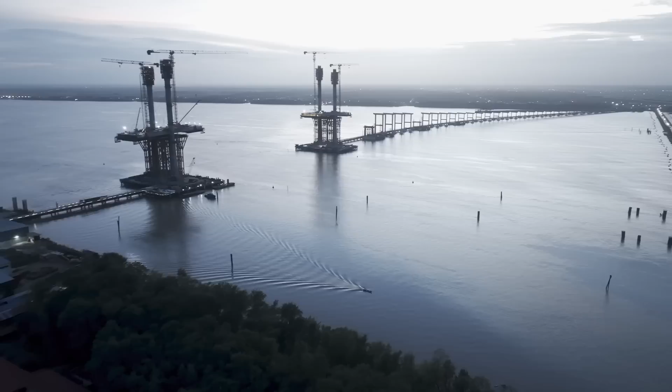One of Guyana's most impressive engineering wonders stretches approximately 1.85 kilometers and connects the country's east and west banks. It features a high-leveled fixed span that provides a horizontal clearance of about 32 meters and a vertical clearance of 7.9 meters for small craft.

Additionally, its ingenious retractable span provides clearance of 77.4 meters, allowing large vessels to pass through, a crucial feature for maintaining the flow of maritime traffic.

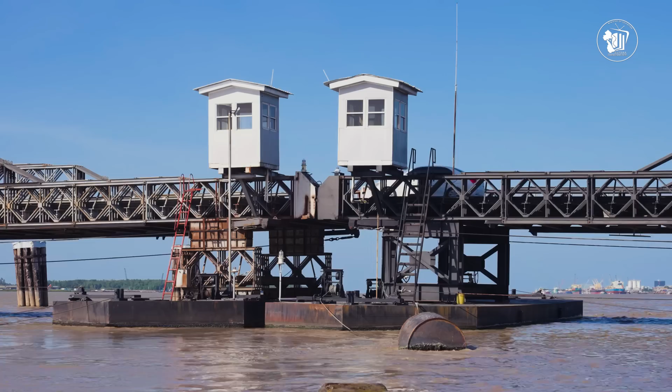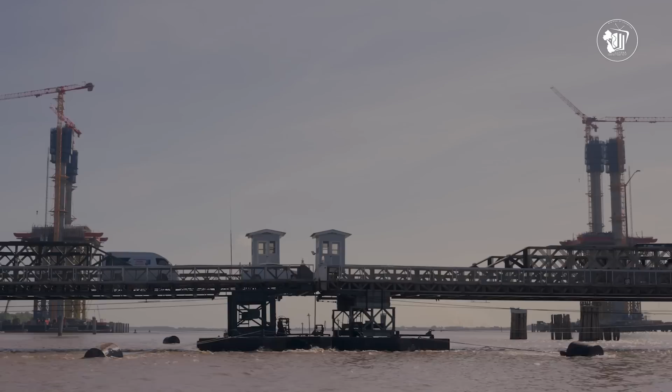Although originally built to last only 10 years, this wondrous floating structure has now stood the test of time for nearly 50 years. To this day, this structure remains the world's fourth longest floating bridge. This is the Demerara Harbour Bridge, old and new.

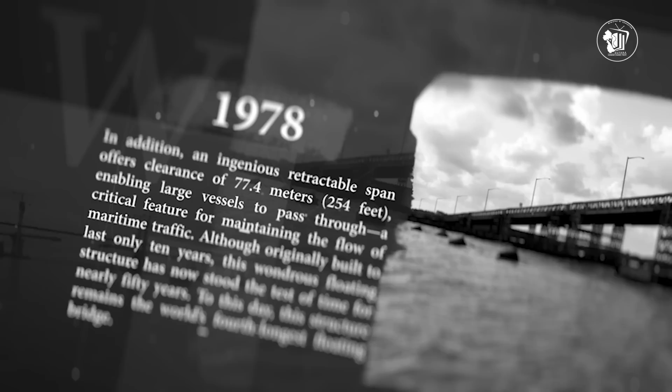Bridging the Demerara River is not a modern afterthought, but a vision that began to take shape several decades ago. Let's take it back to the early 1950s.

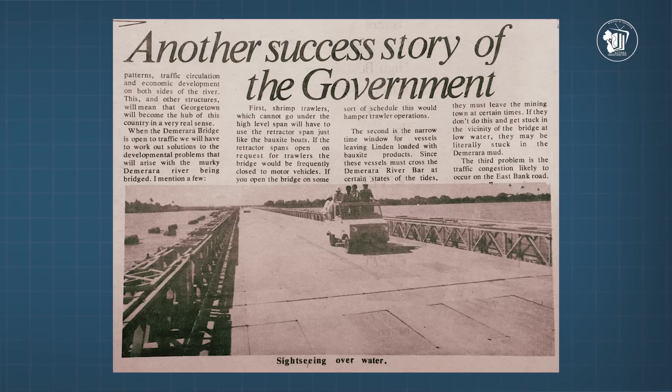In the early 1950s, as British Guiana was experiencing both demographic growth and increasing economic activity, a critical need emerged to improve connectivity between Georgetown and the vast expanses of West Demerara. Before the construction of a permanent structure, ferry services were the primary means of crossing the river, a system that was not only time-consuming, but also unreliable during inclement weather or peak travel periods.

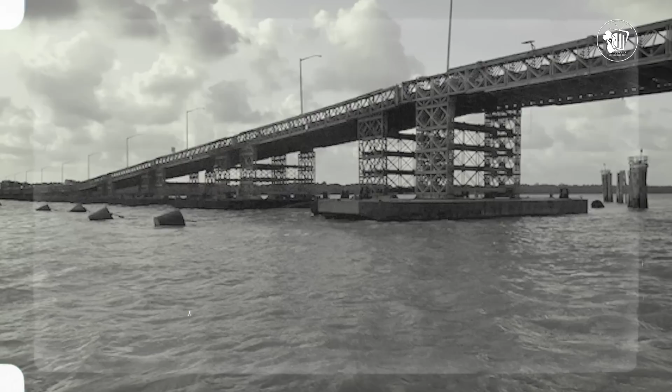A pivotal moment in the evolution of this vision occurred on May 23, 1952. On that day, the Legislative Council of British Guiana debated and subsequently approved the motion that is now recognized as the first substantial official step towards bridging the Demerara River. Introduced by the Honorable Captain J.P. Coghlan, the motion passed by a narrow margin of 12 votes to 9, highlighting that even then, the proposal was both ambitious and somewhat controversial.

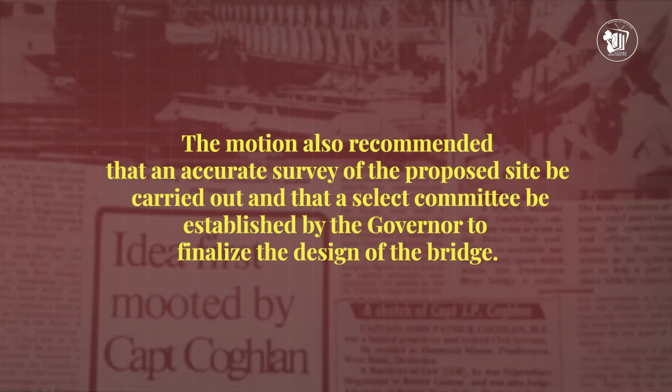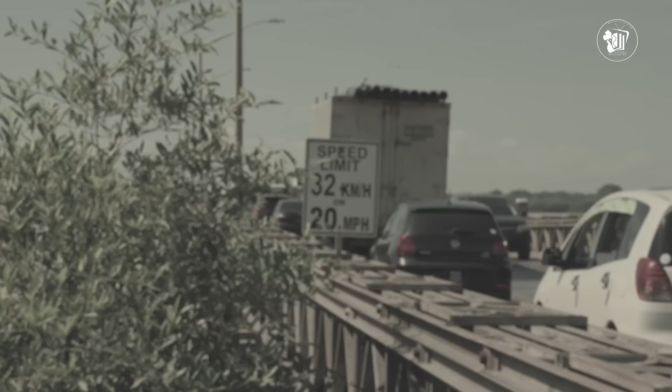This resolution called for immediate preliminary surveys to be conducted, including subsoil borings to determine the suitability of the riverbank strata for supporting bridge piers. The motion also recommended that an accurate survey of the proposed site be carried out and that a select committee be established by the governor to finalize the design of the bridge. In addition, there was a proposal to advertise for tenders and explore financing options, such as floating a loan, to secure the necessary funds for the project.

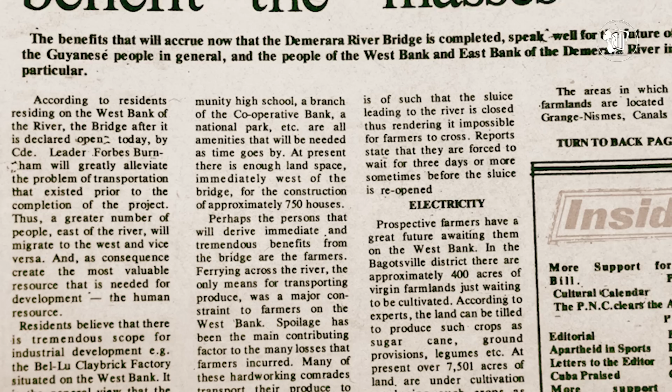Even though no immediate construction followed the 1952 resolution, the motion was far from futile. It established an official framework for conceptualizing such an ambitious project and laid the ideological and administrative foundation for what would eventually become the Demerara Harbour Bridge.

On May 29, 1976, the groundbreaking for the Demerara Harbour Bridge marked the commencement of an ambitious project that would ultimately redefine transport and commerce in Guyana. Central to the planning phase was the input of Captain John Patrick Coghlan, a respected engineer whose ideas significantly contributed to shaping the bridge's foundational design.

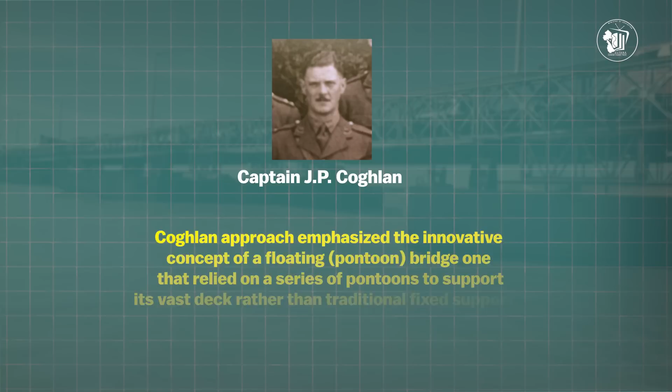Coghlan's approach emphasized the innovative concept of a floating pontoon bridge, one that relied on a series of pontoons to support its vast deck rather than traditional fixed supports. This design was particularly well suited to the dynamic and sometimes unpredictable conditions of the Demerara River, as it allowed the structure to adapt to changes in water levels and currents.

The unique engineering required innovative techniques in welding, soldering, and metal fabrication, pushing the limits of what was considered possible in the region. Constructing such a vast and adaptive structure required significant resources.

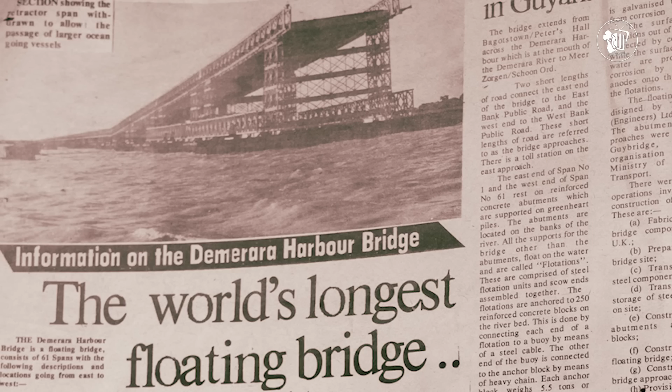Approximately 80,000 tons of steel were used, much of it soldered and molded on site using advanced metal fabrication techniques. Although early estimates placed the project cost between $4 and $10 million, the final expenditure reached roughly $40 million, reflecting both the complexity and the ambition of the undertaking.

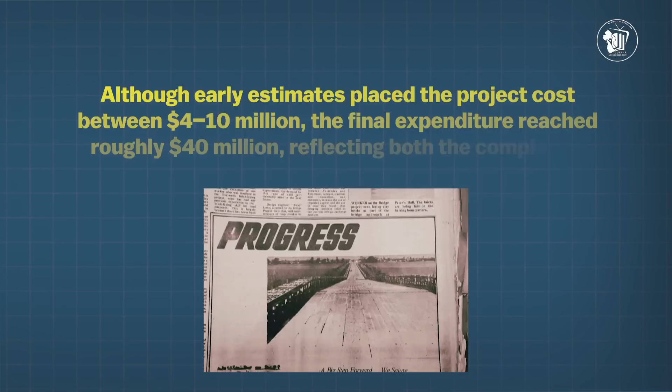After 2 years of hard work, the bridge was completed just in time for its ceremonial opening in early July 1978.

The inauguration was celebrated as a major milestone in Guyana's development, signaling a new era of connectivity and economic potential.

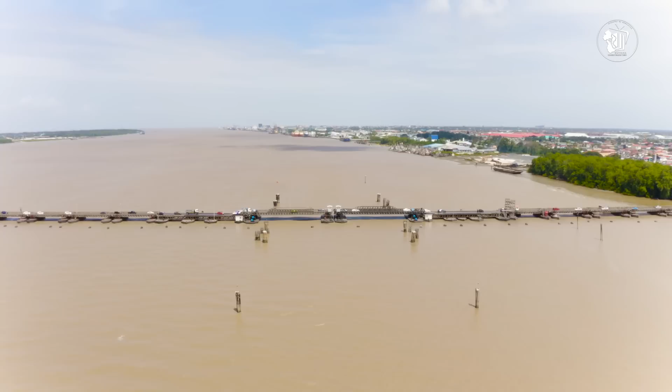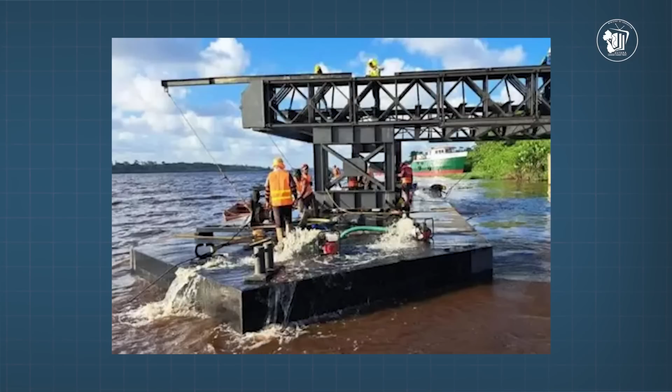Even though the Demerara Harbour Bridge was originally built with a design life of just 10 years, it has defied expectations. Now almost 50 years old, this floating structure continues to serve as a critical artery between Guyana's east and west banks, a testament to the visionary design and relentless maintenance efforts that have kept it operational long past its intended lifespan.

Its enduring strength lies in its innovative floating design. The system of 121 pontoons working in harmony to support 61 spans has allowed the bridge to adapt to the dynamic conditions of the Demerara River tides, currents, and seasonal fluctuations that would have posed significant challenges to a conventional bridge. The design entails 61 spans. During that time, it was predominantly what we call unifloats. Now we're using pontoons. The unifloats provide the same flotation as a pontoon.

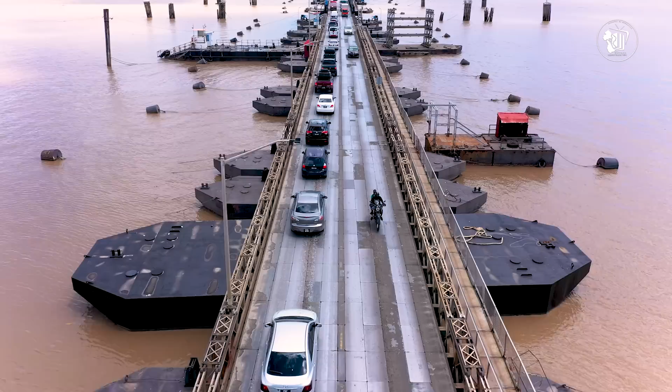Currently you have 121 pontoons that consist of the buoyancy of the bridge. You have 243 buoys. You have a total of approximately 35,000 feet of wire rope. You have a total of approximately 72,000 feet of chain. And you have a total of 726 5-ton anchor blocks. These blocks are in clusters of 3.

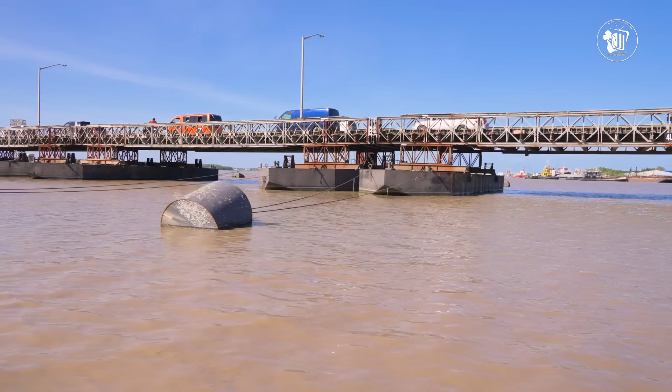So to every buoy that is in the water, you have an anchor chain linked to the buoy. The cluster pile is about 15 tons. Then the buoy is linked to the pontoon via sheaves, wire rope, and then you have winches that are used to adjust the buoyancy or the alignment of the bridge. So it's a combination of anchor blocks, chains, buoys, wire ropes, and the pontoons.

As I said, you have 726 anchor blocks lying on the riverbed. And these anchor blocks have what we call eyes, which is about a 1-inch thick metal cast in the block. And those blocks are linked via shackles. And then you have the chain connected to them. That chain goes to the surface of the water, connected to buoys.

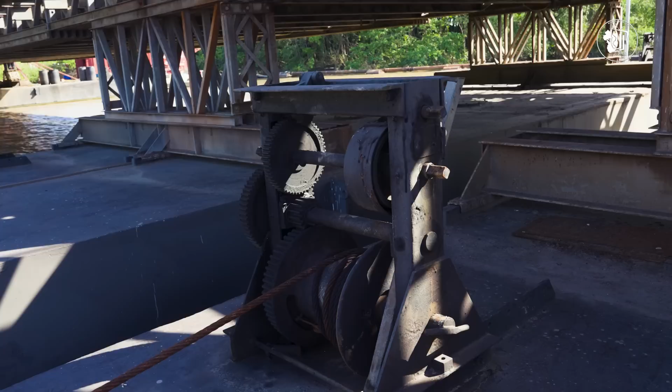These are some hollow metal components that are floating. They float. And then from the buoys, you have what we call sheaves. It's like a pulley, and the wire rope passes through the pulley. So as you have movement of the water, you have adjustment. And those wire ropes are then linked to the pontoon via the winches.

So based on the tide, you can do adjustments, right? You have logs where we've adjusted the tension of the wire rope, chain, buoy combination that provides that stability.

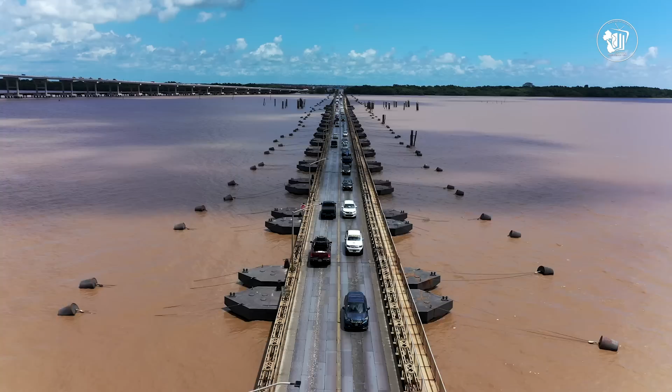So the main component that provides that buoyancy or the floating of the bridge are the pontoons. That is the 121 pontoons. You have two different sizes: what we call the extra large, and the small pontoons.

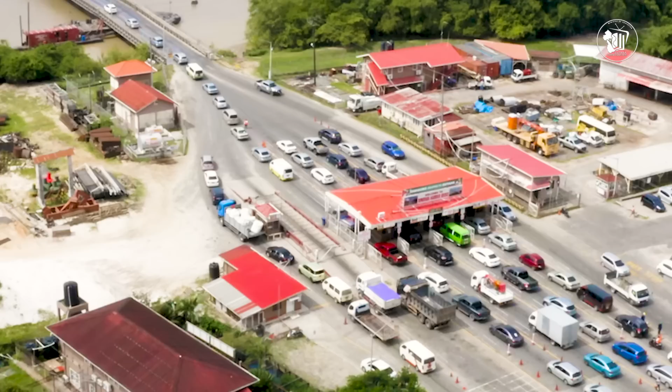Every day, the Demerara Harbour Bridge is a hive of activity. In its early years, around 9,000 vehicles crossed the bridge daily. Still, with the continuous growth of Georgetown and the surrounding regions, current estimates indicate that as many as 14,000 vehicles traverse this vital link each day. This impressive volume of traffic translates not only to thousands of commuters, but also to a significant movement of goods, connecting rural communities with urban markets and facilitating economic activity across regions.

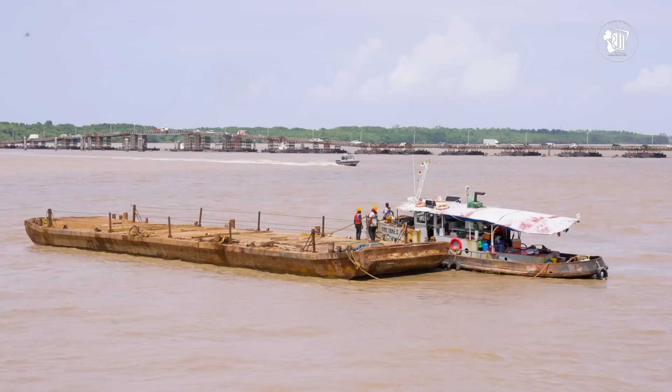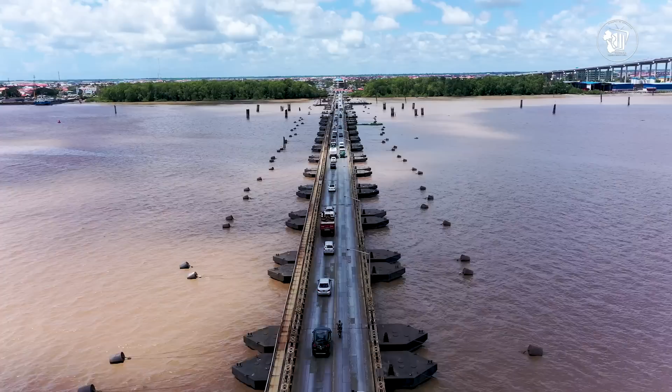Maintaining a structure of this magnitude and age is no small feat. One of the unique aspects of the bridge is that it's what we call a sectional bridge or panel bridge. So you have components that are connected one to the other, either by pins or bolts. That gives you the option of removing a component when it is bad or damaged and replacing it. For example, the sides of the bridge have panels, and all those panels are linked via bolts or pins. So if you're going to do a repair to a section, you remove the deck plates.

Back in those days, deck plates were not welded. They were secured by a different method than what we're using right now. So you had to unscrew those components, and you could retrieve the deck plates.

We have the end posts. Those are also pin located, secured by pins. You have the transom beam, you have rakers, you have other components. So the access to repair or replace is much more flexible than a fixed bridge.

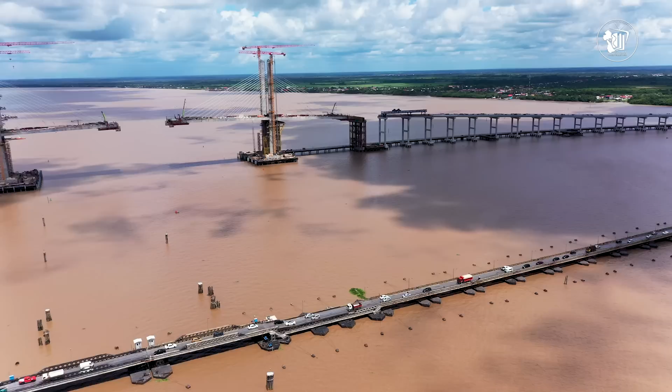Over time, the local knowledge would have increased and improved, and that is what caused the sustenance of the bridge. Not only Demerara Harbour Bridge Corporation employees, but other local companies are part of the maintenance regime. If you do the proration now, approximately 30,000 vehicles transit the bridge daily, east to west or west to east. The capacity of the vehicles transiting the bridge is much more in terms of weight.

So what we are doing right now, from when I took the reins as general manager, is what I will dub proactive work. We're doing day-to-day inspection, with teams going on the bridge daily to cover the carriage and undercarriage, and all the necessary key components.

You have zones we call braking and accelerating zones, where the vehicle accelerates or reduces speed. Key components such as the chains and wire ropes are checked. Also for the retractor span, you have rollers and other components that need to be inspected, apart from the deck plates on the bridge.

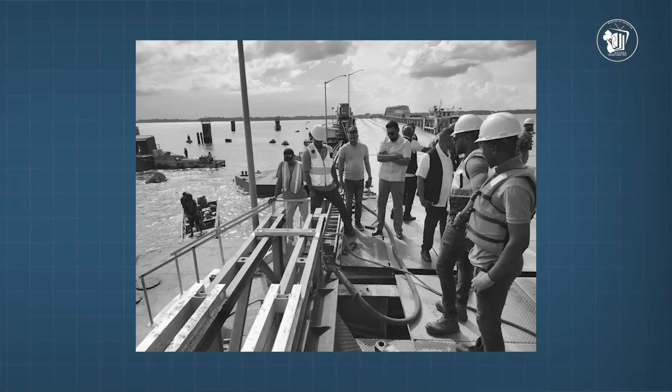So we do a daily routine, morning and afternoon. Out of those inspections, we prioritize the important work to be done in terms of maintenance or replacement. If the maintenance work is major, clearance will be sought via the minister, because the bridge will have to close for most of 4 hours. If the work is minor, we do it between 10 p.m. and 4 a.m.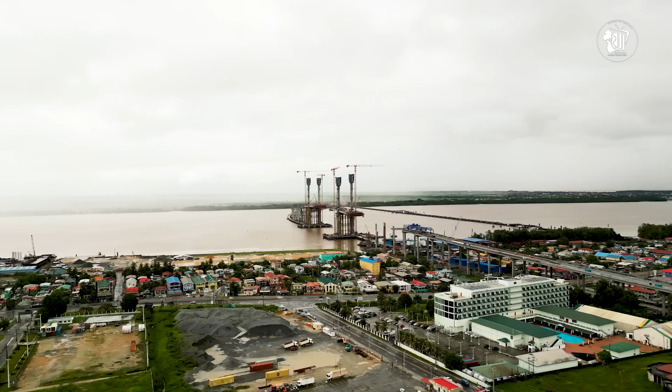As Guyana faces mounting challenges from an overburdened and aging Demerara Harbour Bridge, the need for a modern, resilient replacement has never been more urgent. Decades past its original intended lifespan and strained by ever-growing traffic, the old bridge has become both a bottleneck for commerce and a costly maintenance challenge. Its limitations not only disrupt daily commutes but also impede the efficient movement of goods, a critical factor in Guyana's economic growth.

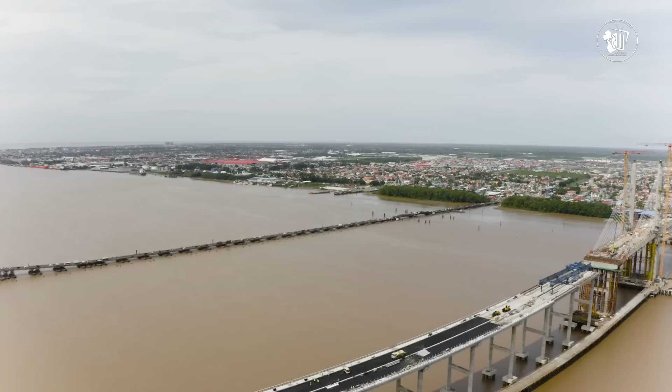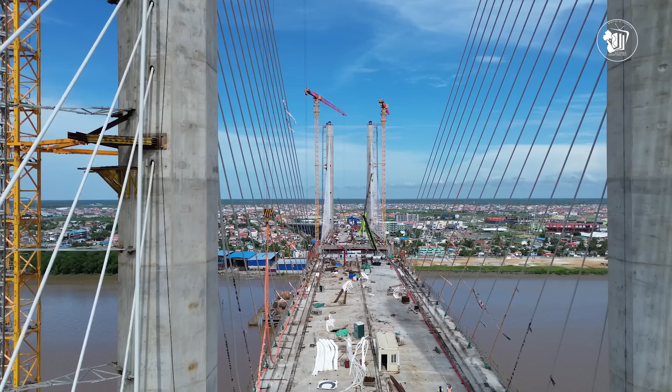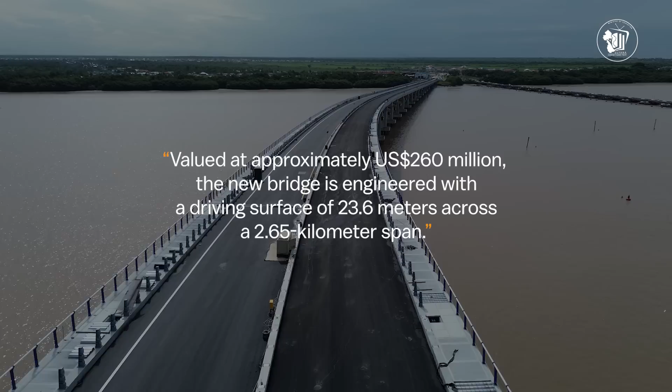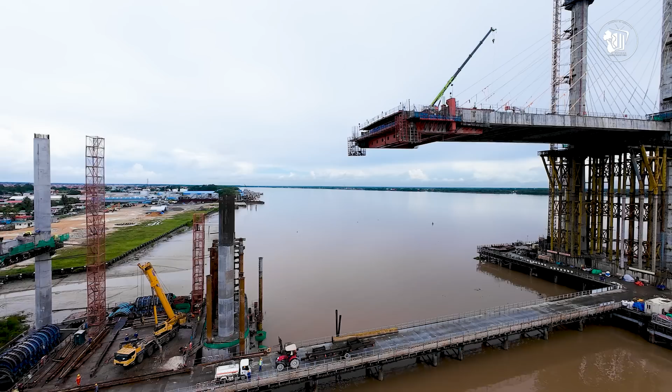In response, the government embarked on constructing a state-of-the-art Demerara River Bridge, a fixed 4-lane high-span cable-stayed structure designed to meet the demands of the 21st century. Valued at approximately US$260 million, the new bridge is engineered with a driving surface of 23.6 meters across a 2.65-kilometer span. Its modern design eliminates the need for retraction to allow maritime traffic, thanks to a generous 50-meter fixed high span and a clearance that permits large vessels to pass unhindered. This means that once completed, the bridge will dramatically reduce travel delays and congestion, enhancing both road and maritime connectivity.

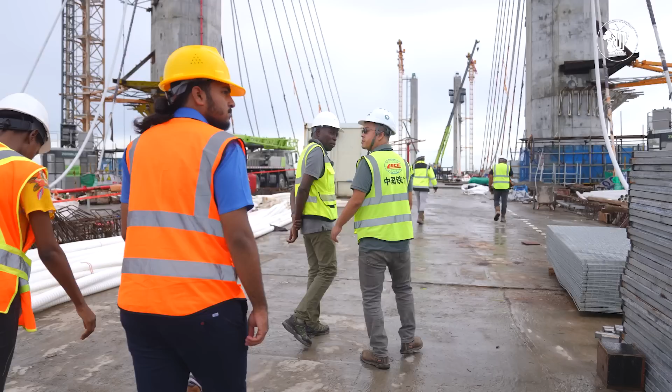While on site, we spoke with Patrick Thompson, the project manager at the Ministry of Public Works, who walked us through the extensive process behind planning and bringing a project of this magnitude to completion. The timeline for this project meant working around the clock.

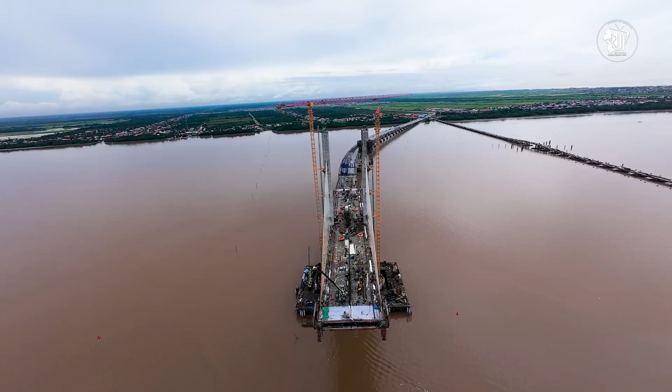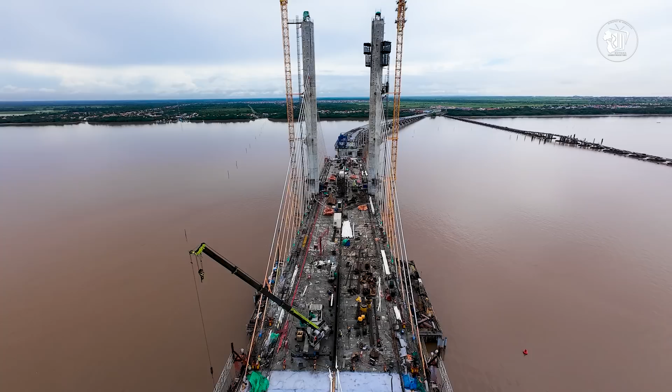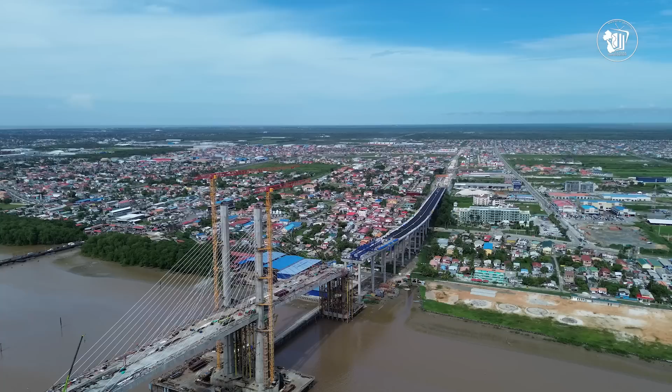So the bridge is actually comprised of one complete structure from east bank to west bank, measuring about 2.97 kilometers, just under 3 kilometers total. However, from a construction perspective, the bridge is divided into 3 parts: the eastern approach bridge on the east bank, the western approach bridge, and what we call the main bridge.

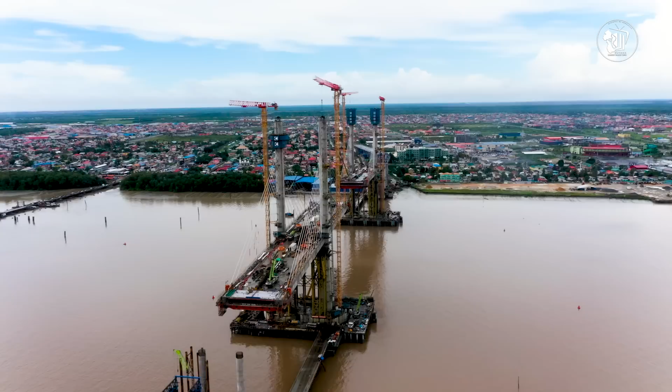Now, the main bridge is about 570 meters and goes over the navigational channel. That's where the cable stay section of the bridge is located. The main bridge was built to accommodate marine traffic that would need to pass through the harbor. The design vessel, or the most critical vessel used for the design of this bridge, was a vessel called a Handymax vessel.

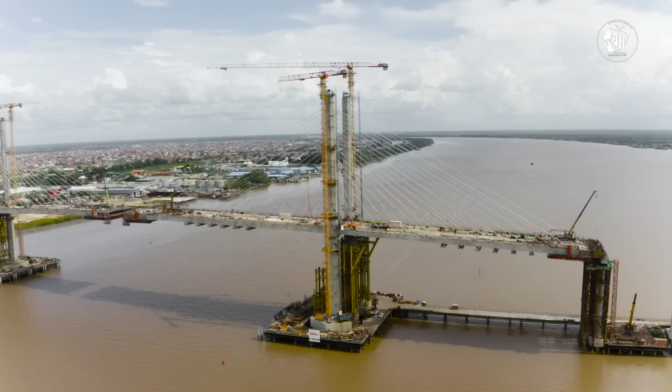Which requires a vertical clearance of about 48 meters. We actually have out there a clearance of about 50 meters from the median water level. That's a huge container vessel I'm describing. It also requires a horizontal clearance of about 205 meters. We have more than that, a 300 meter clear span out here.

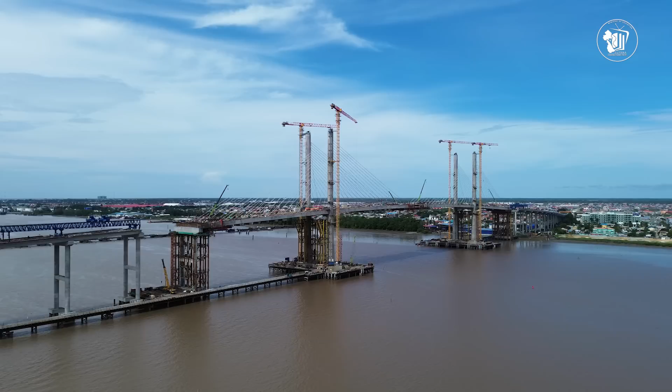So in future, as Guyana transforms and our economy expands, we will be able to accommodate much larger vessels into the harbor, provided that the channel is sufficiently dug and maintained to accommodate these vessels.

It was sometime around 2013 when the then Minister of Public Works, Minister Benn, called me and said, Patrick, we need to start planning for a new bridge across the Demerara River, and we need to start doing the studies and designs that will facilitate that. He said we're going to do the studies using our local engineering resources, so put together your team, and we have some senior engineers in the private sector. We'll bring them together and develop a prototype for a bridge across the river.

Those were the first set of conversations we had, and we were successful with the help of some of our local engineers. We did have guidance from a Trinidadian professor/engineer at that time, who's now deceased. Over a period of about 6 months, we developed the first pre-feasibility study for the new Demerara River Bridge. Subsequent to that, a full feasibility study was done by a Dutch company that looked at several possible locations for the siting of the bridge.

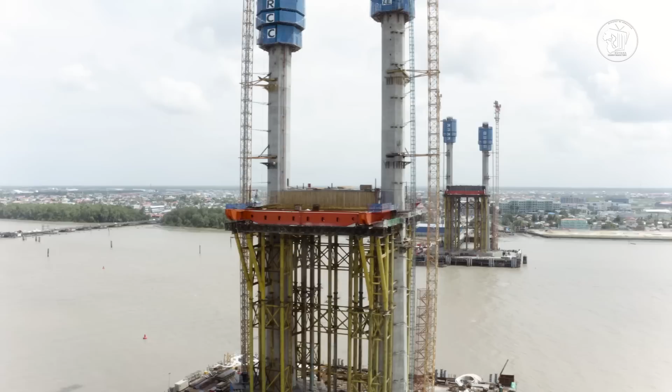This was one of the locations, and there were about 5 others, including farther north, closer to the Houston area, and farther south at Good Hope, Laurentia, Potentia area. Those were the very early planning stages of the project before we finally got to the point where a decision was made by His Excellency President Ali

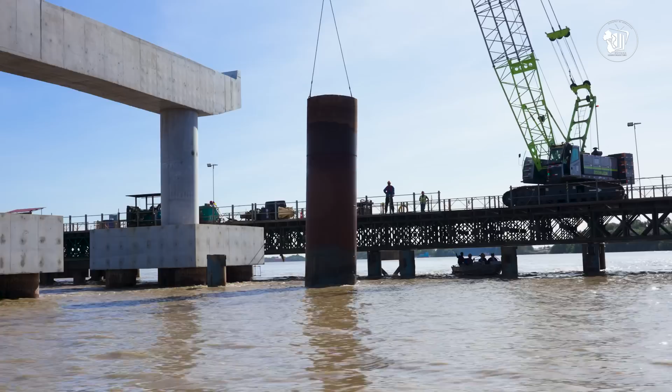that this was going to be the location of the bridge. It was going to be a cable stay bridge, and we were going to do a design-build project, which means we were going to hire a competent construction firm that has the capacity to both design and build the bridge. So we went out to tender, and after several rounds of negotiation, we finally awarded the contract to China Railway Construction Corporation Limited, which is part of a consortium of Chinese firms currently building the bridge.

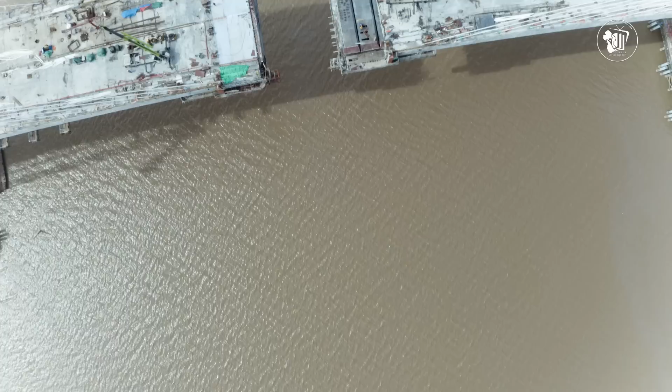When this bridge is completed, it'll be nothing short of a miracle. Construction on a timeline like this only happens in Asia, or more specifically in China. The first pile for this bridge was constructed in December 2023 - that's just about a year and a half. In a year and a half, we are a few months from the actual completion of the bridge. So this bridge is going to be built in much less than 2 years. That's a feat achieved only in China, and of course, it's a Chinese construction firm that's doing it.

I have done research on comparable structures in North America, and a bridge like this would normally take about 4, 5, or 6 years to complete. So by all means, what we are achieving in this country is monumental. And of course, it's a collaboration of the Chinese construction company with our local resources - our engineers, planners, technicians - supporting the project, as well as the supervision of Politecnica, an Italian firm awarded the contract to be the supervisory engineer for this project.

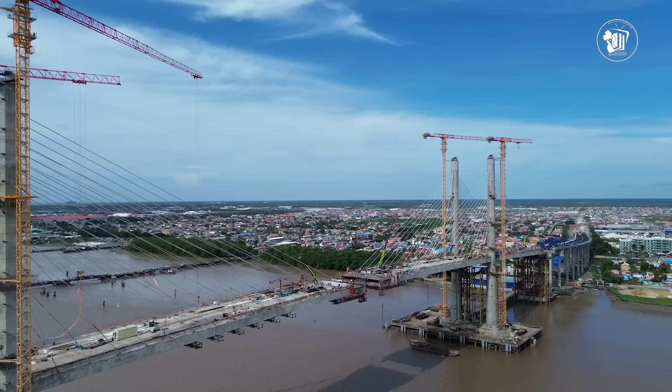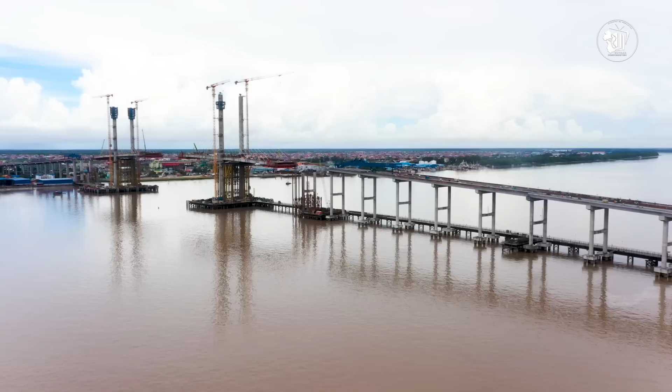Based on the most recent progress report, we have finally hit the 90s for the percentage completion of the project. We're somewhere around 91% as we speak today. So we are on the last lap, if you'd like, and you will see some footage of how close we are to really completing this bridge.

You must have the appreciation - it's a monumental task being done, and work is being done on a 24-hour basis here. We have more than 1,395 employees, mostly Chinese, but a fair percentage of Guyanese, Venezuelans, Cubans, and other nationalities working on this project night and day. We hope that by August 31st, this bridge will be completely finished and ready to be commissioned.

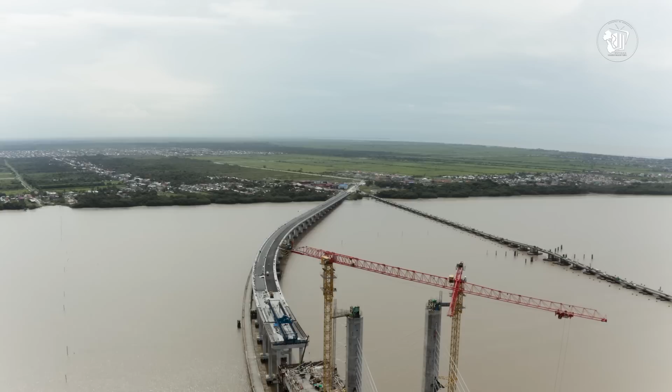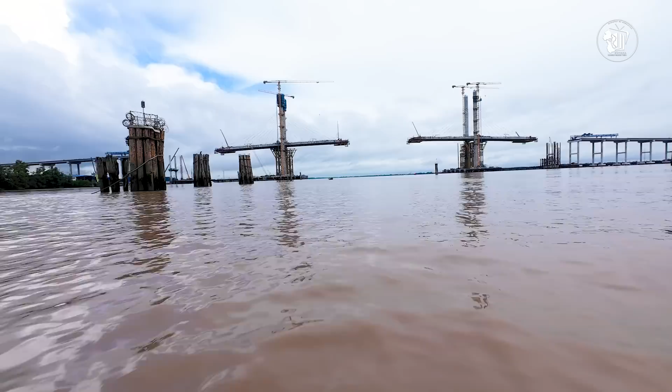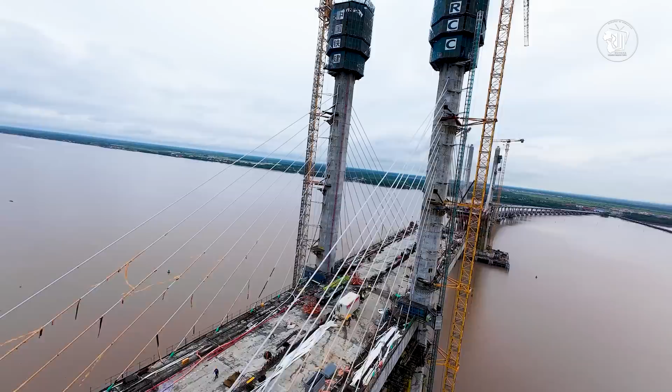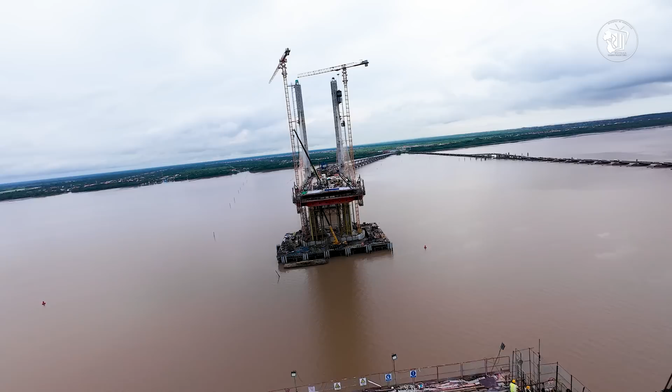Construction is well underway under the joint leadership of China Railway Construction Corporation International Limited and its partners. Recent updates indicate significant progress on key structural components, from completed temporary structures and approach roads to the installation of major precast girders and piers. Although the project has encountered typical delays, the government remains steadfast, with revised completion targets set for the end of August. These adjustments reflect a commitment to ensuring that every facet of the bridge meets the highest international standards for safety and durability, promising a lifespan of at least 100 years.

The bridge's marvelous design isn't something that is done overnight. This being a mega infrastructural project for Guyana, right? As you can see, it's all reinforced concrete, which requires a mass volume of aggregate, sand, cement, critical components to make this come together as one, right?

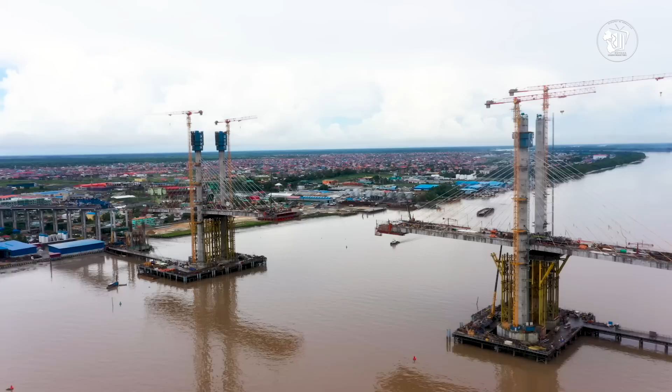Right now we're on the main bridge, right? As you can see, there's like a double H tower - in engineering we call it a double plane of stay cables, which would support the cable stay bridge deck, right? And the reason for this being so long is so that you don't have to worry about opening and closing of the existing bridge, right? Because now ships can travel through the main navigational channel without obstructions.

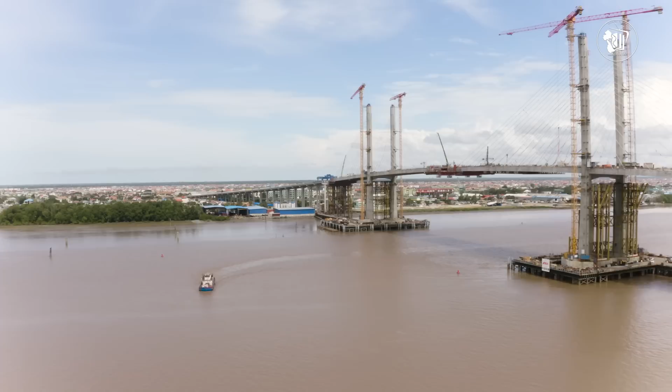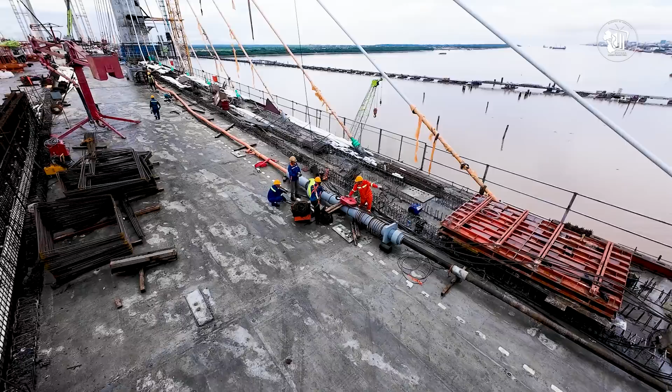Building such a structure doesn't come without its challenges, especially when over 1,400 workers are involved. We're working currently at about 120 meters right now, which is pretty high. So I have a team out here monitoring, ensuring this happen, doing daily toolbox talks with the team. And if there is something more that's changing, maybe the weather, then I will stop. We will have another session, a discussion, and then we'll send them back out to work.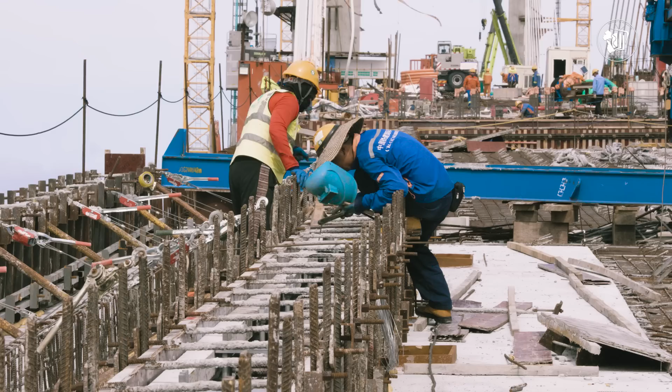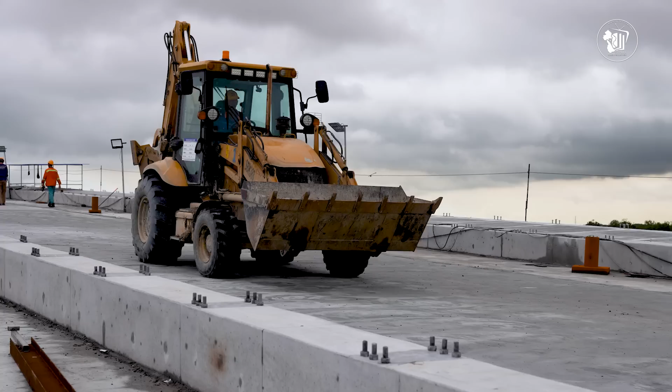Once the employees start working, there are JSAs, which is job safety analysis, that I utilize to train the employees in the field. Basically, there is a daily checklist, especially with any equipment on site. That starts from the generators, the electrical boxes, and there's a checklist done. Once that's done, we would have the talks with the operators. And again, I have a team, the supervisors. They will ensure anything that's traversing around the equipment. I have banksmen with the equipment. So there's always someone there watching.

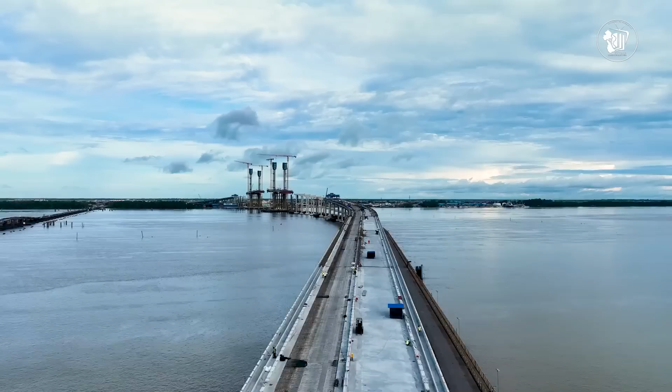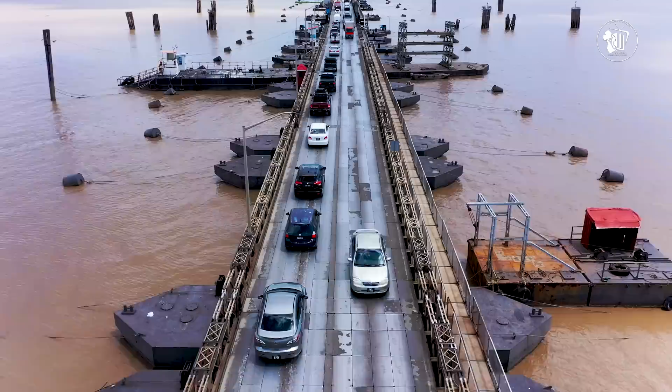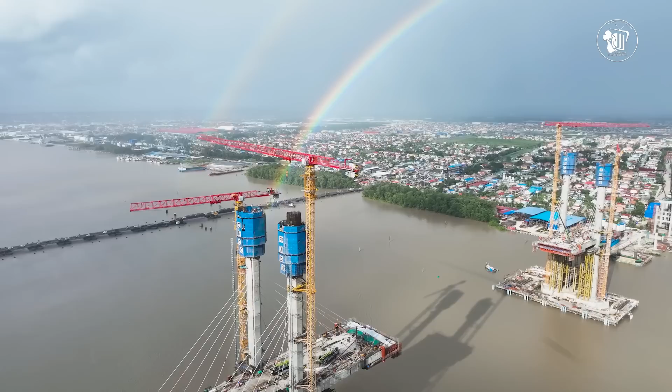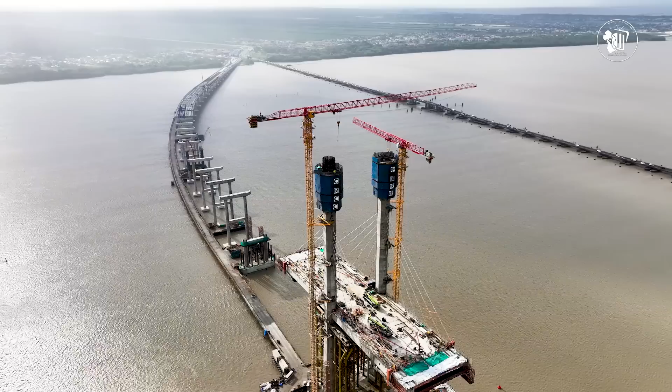Beyond easing traffic woes, the new bridge is poised to be a catalyst for nationwide socioeconomic transformation. By slashing travel times, it will free up millions of productive hours currently lost in traffic congestion, a benefit estimated to save billions of dollars in economic output. Moreover, improved connectivity between regions will stimulate investment, foster industrial growth, and create job opportunities, while also enhancing the quality of life for thousands of Guyanese who will enjoy shorter commutes and more time with their families. In essence, the Demerara River Bridge represents not merely an infrastructural upgrade, but a visionary leap forward for Guyana, a strategic investment in a future where efficient transportation underpins broader national development and prosperity.

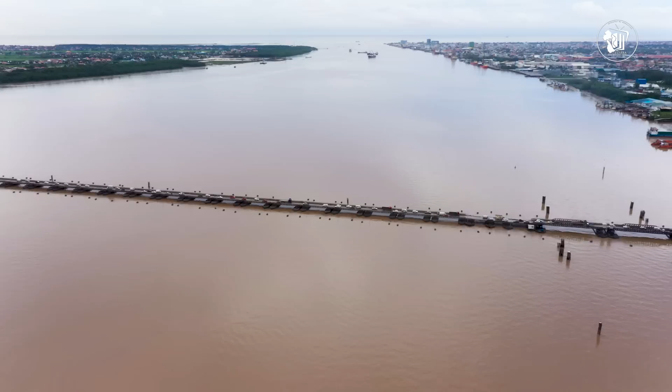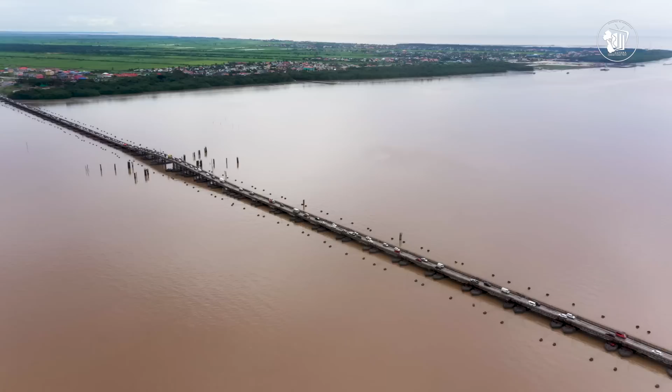The journey of the Demerara Harbour Bridge has been one of vision, resilience, and unwavering commitment. From the ambitious plans of the 1950s to the dedication of the engineers who breathed life into the floating structure, this bridge has become a symbol of Guyana's determination to unite its east and west. Its innovative design and enduring strength have not only overcome what once seemed impossible, but also sparked economic growth, allowing the movement of goods and people far beyond what anyone first imagined.

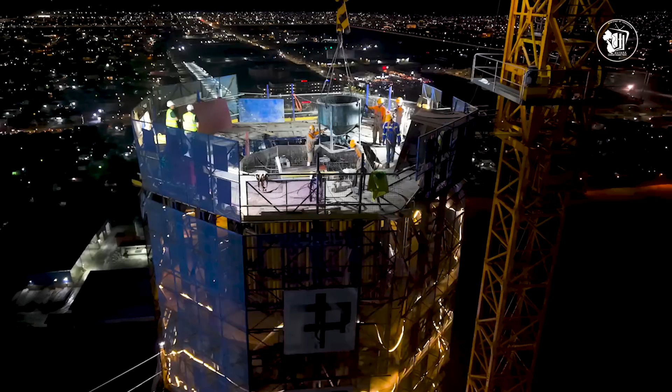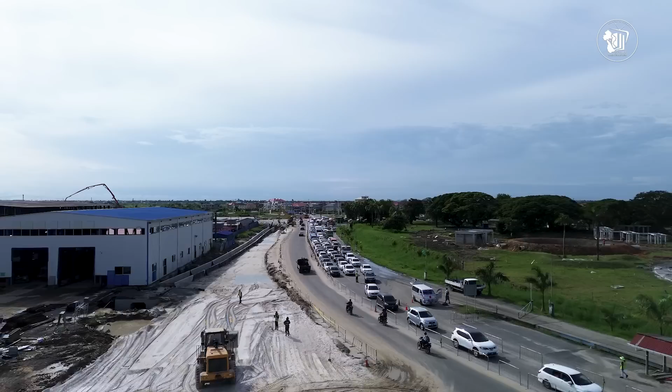Now, as we look ahead, the construction of the new Demerara River Bridge ushers in a new era of connectivity. With its state-of-the-art features, the new bridge will elevate the country's standing on the world stage. It offers the promise of colossal project completion as the nation expands into exciting new economic potentials. The benefit of this successor project will ripple across the nation, transforming daily lives, creating jobs, stimulating investment, and reducing time lost in traffic, ultimately driving Guyana's progress forward.

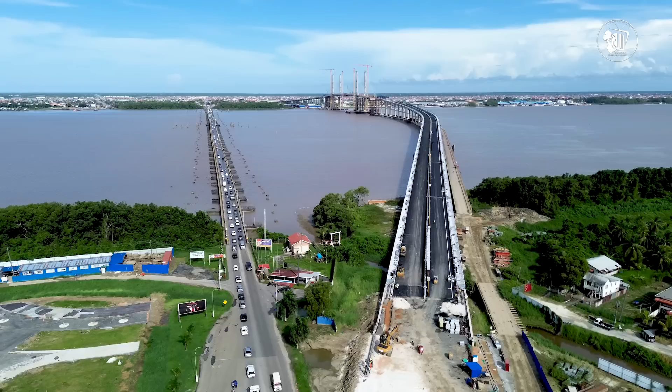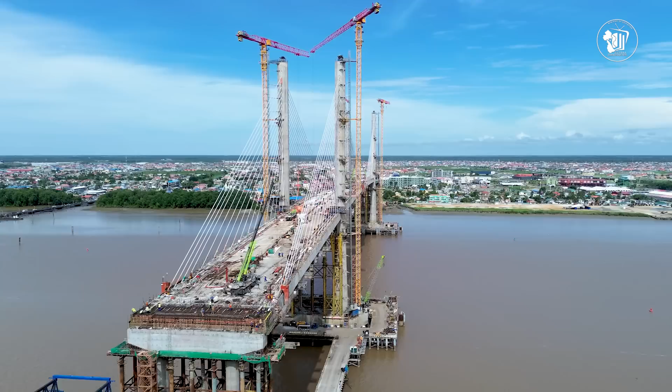The Demerara River Bridge is more than just an infrastructural marvel. It represents the nation's burgeoning spirit of growth, perseverance, and forward thinking. Once complete, the new link is setting the stage for a prosperous and united future, where connectivity, progress, and opportunity flourish, and where the dreams of yesterday become the successes of tomorrow.